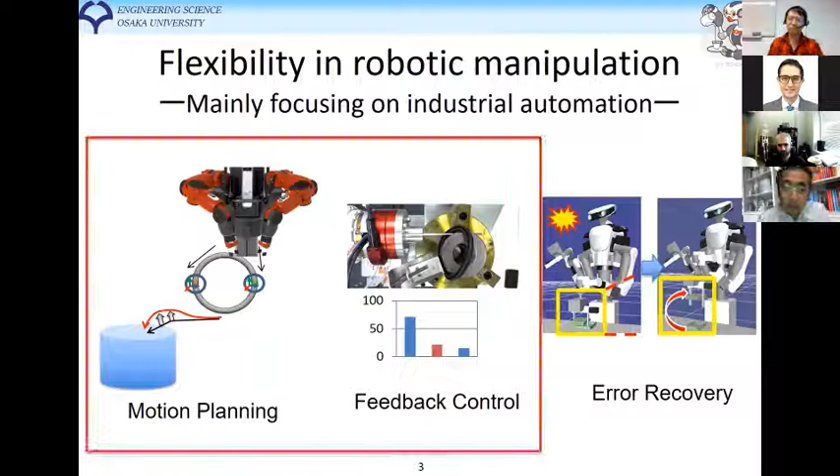Today I will briefly explain my research on robotic motion control and planning and deformation. I mainly research robotic manipulation and its application to industrial automation. Today I would like to explain three topics on flexibility in robotic manipulation: one is motion planning, the second is feedback control, and the third is error recovery. First, I would like to explain the two topics of motion planning and feedback control.

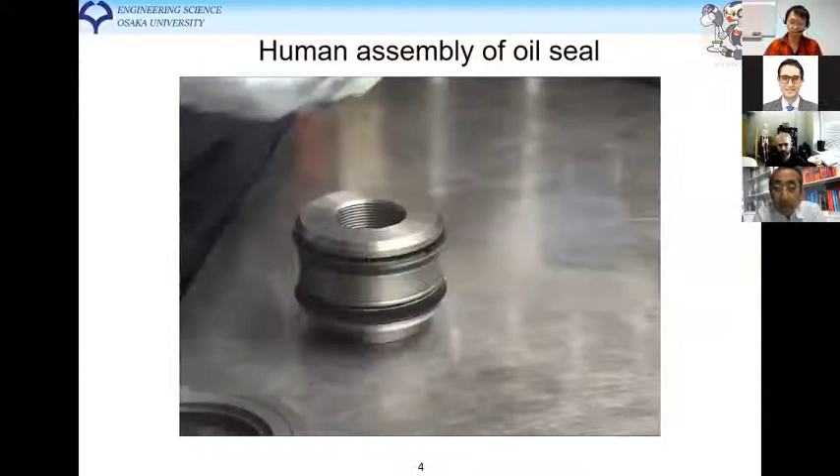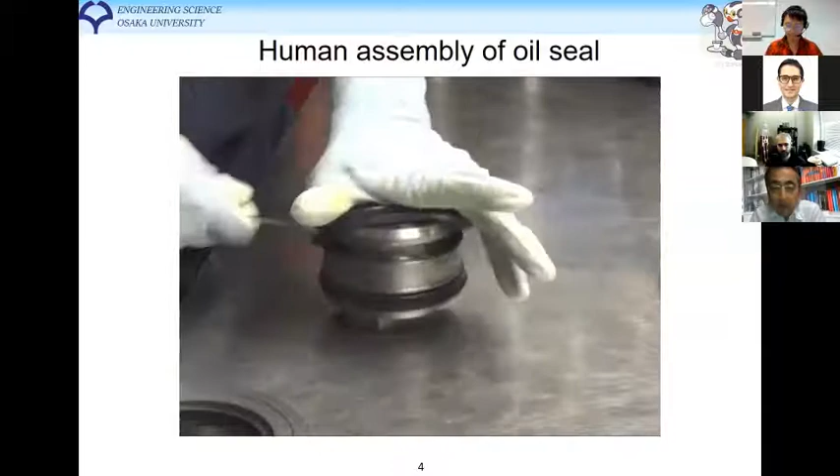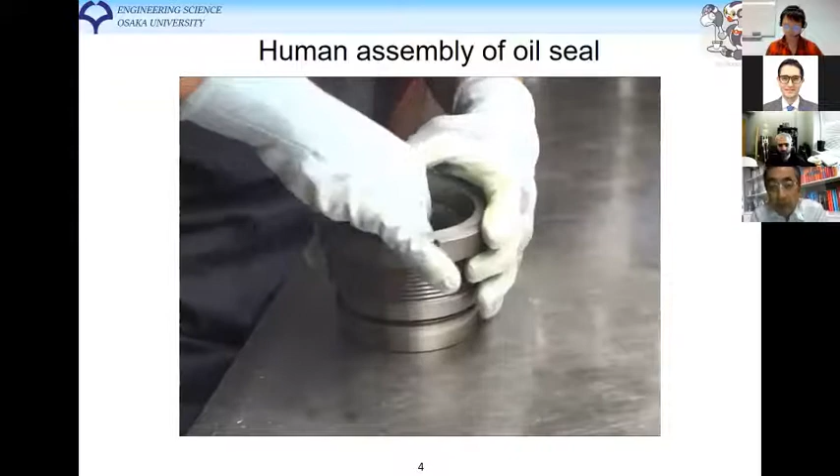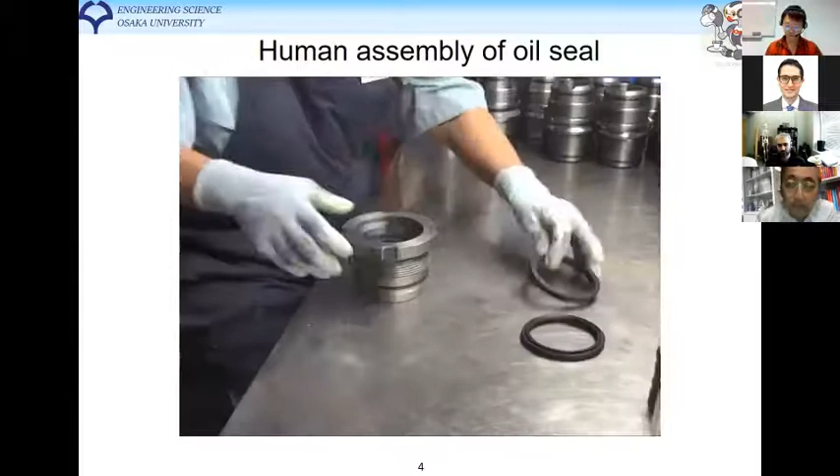This is a typical case of flexible object manipulation used in assembly. This is the human assembly of an oil seal. The oil seal is made of rubber and has a ring shape. To assemble it to the outer surface of the piston, or the inner surface of the cylinder, the human is skillful enough to assemble these flexible parts very fast. And we consider replacing this task by using robots.

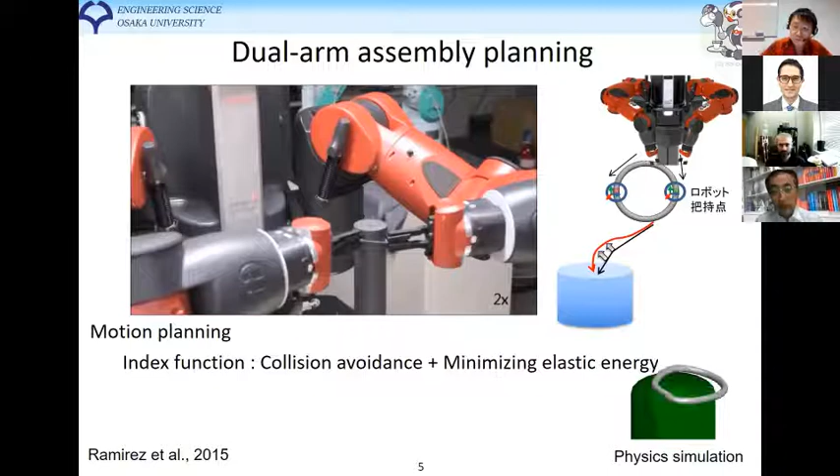First, we constructed the dual-arm assembly planner to assemble a ring-shaped object to a cylinder. In this case, we use an index function to plan the motion of the dual manipulator. The index function is composed of collision avoidance and minimizing the elastic energy. That motion is constructed with the help of a physics simulator of the assembly of the ring-shaped object.

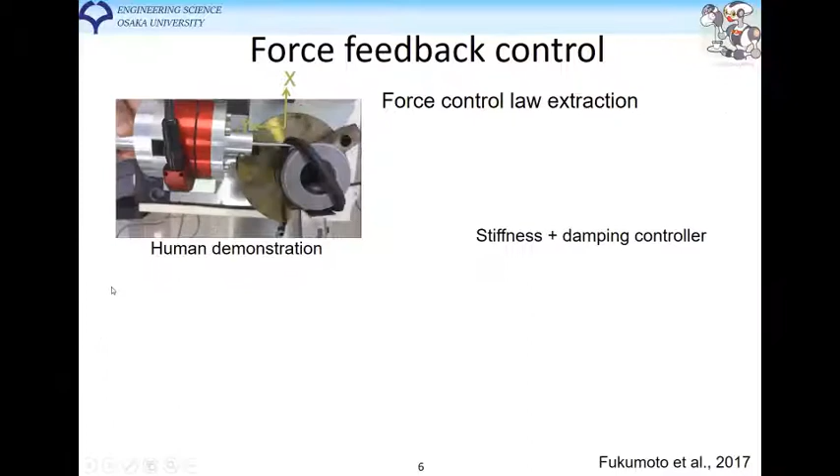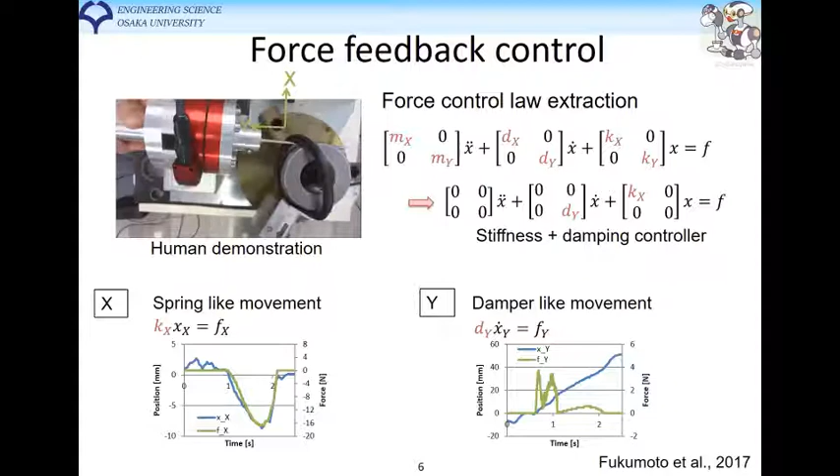Then I would like to focus on feedback control. In this case, first we use human demonstration to extract the force control law. The horizontal direction is y and the vertical direction is x. We found from the force and positional response that in the x direction, the motion is a spring-like movement, while in the y direction, it is a damper-like movement. So we decided to apply stiffness control in the x direction and damping control in the y direction.

Then we consider optimizing the force control parameters of the damping control and stiffness control. By optimizing the force control parameters, we could successfully reduce the peak force to 63%, which is very close to the level of human assembly.

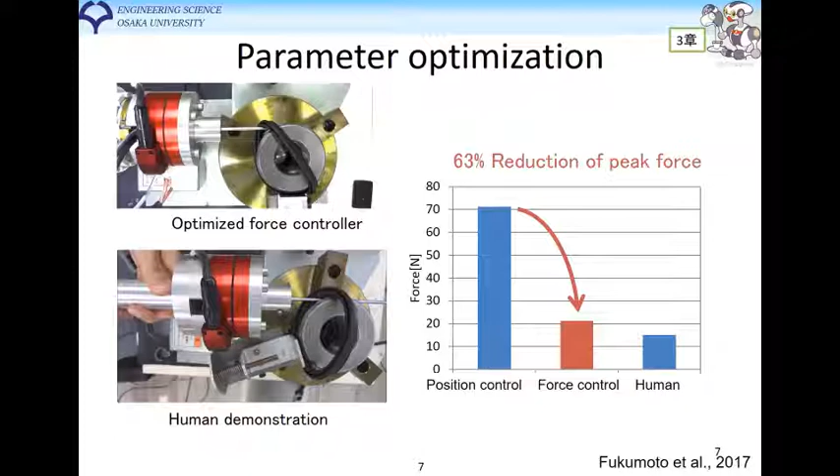Next, we would like to introduce the second topic, error recovery in snap assembly. We focus on the assembly of plastic parts, including snap joints. Parts with snap joints are very easy to assemble, but very difficult to disassemble. Hence, it is very important to identify the error state before the error actually occurs. In this video, the top shows the successful case, and the bottom shows the failure case.

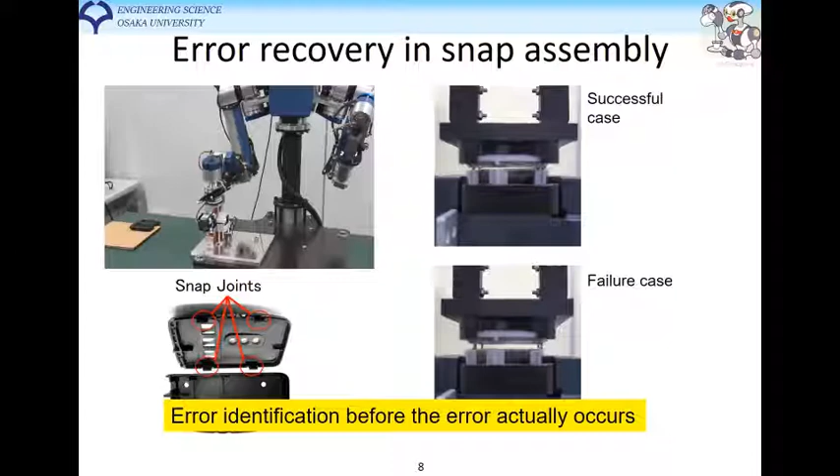This slide shows our algorithm. In the training phase, we obtain the force-torque profile during the assembly and extract features. Then we train on the features using SVM and classify the error states. In the execution phase, we first identify the error state, so the error is identified before it actually occurs. After identifying the error, we recover from the error state.

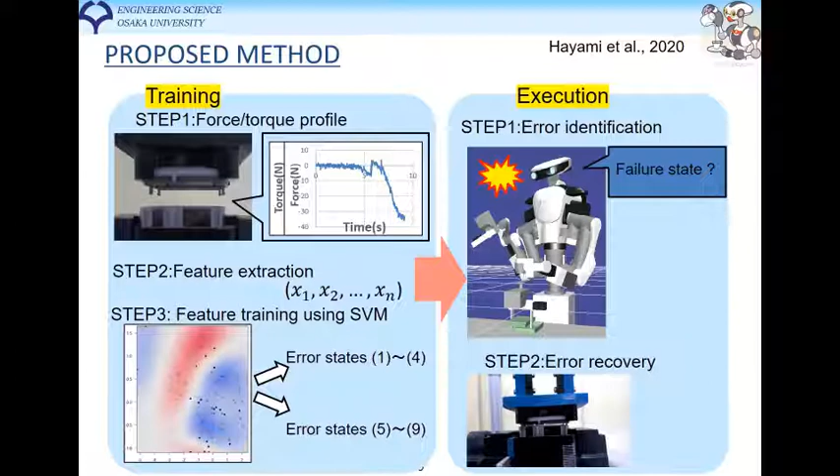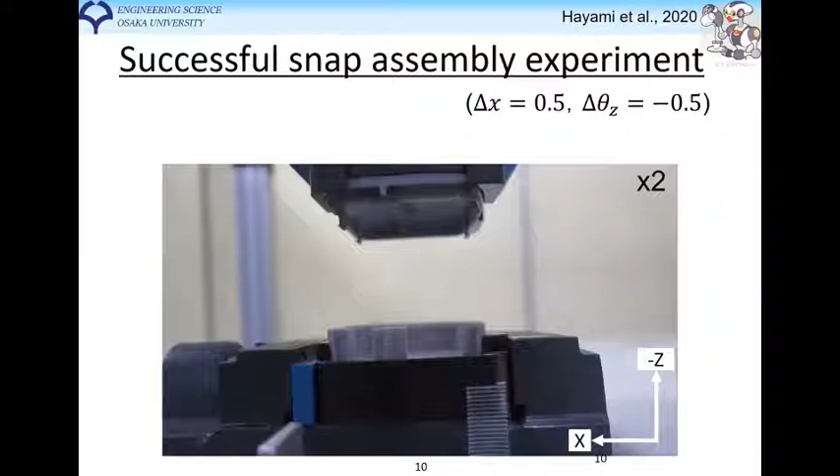This is the successful case of assembly, which is very normal. First, we stop assembling the object before the assembly is actually completed. This shows the error state, and in this case, the error is identified. Then the male part is lifted up again, the error is recovered, and the robot tries to assemble the male part again.

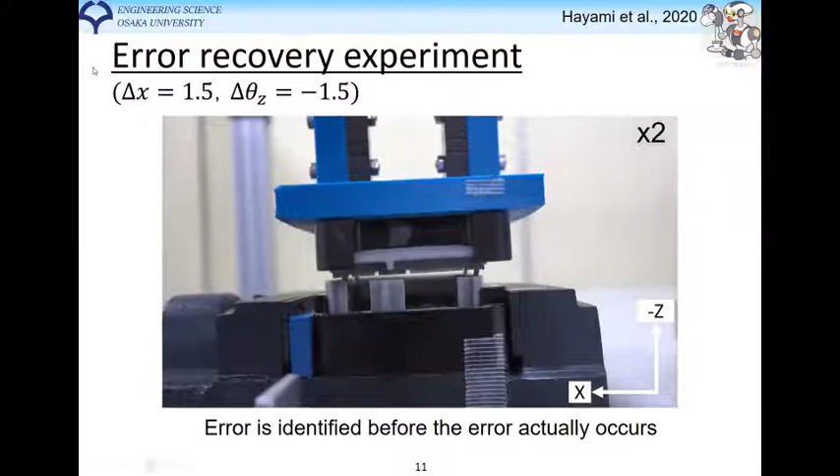And this is the final case. In this case, the error is identified. The robot tries to identify the error, but the accuracy of the identification is not large enough. So the robot additionally moves the male part in the horizontal direction a little bit, and then tries to identify the error state again.

Then the robot recognizes that the robot is going to make an error. Then the robot lifts up the male part, modifies the position of the male part, and tries to assemble it again.

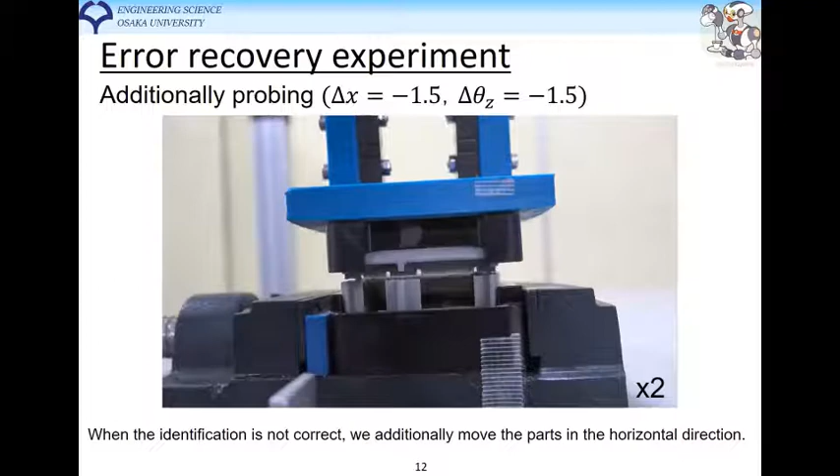I'm Mathew Schwartz. I did my undergraduate at the University of Michigan in design and sculpture. So that kind of starts off with addressing one of those questions. And after that, I went to Michigan for my Master's of Science in Architecture. And after then, I moved to Seoul National University, and I was a full-time research scientist at the Advanced Institutes of Convergence Technology with Jaeheung Park, who manages the Dynamic Robotics Systems Lab.

And through there, I connected my interest in human factors and research with robotics and manufacturing, because his lab focused on torque control, full body robot control of humanoids. Since then, I had a short time at Nanyang Technological University in the Rehabilitation Research Institute, and now I'm an assistant professor in architecture and design at NJIT.

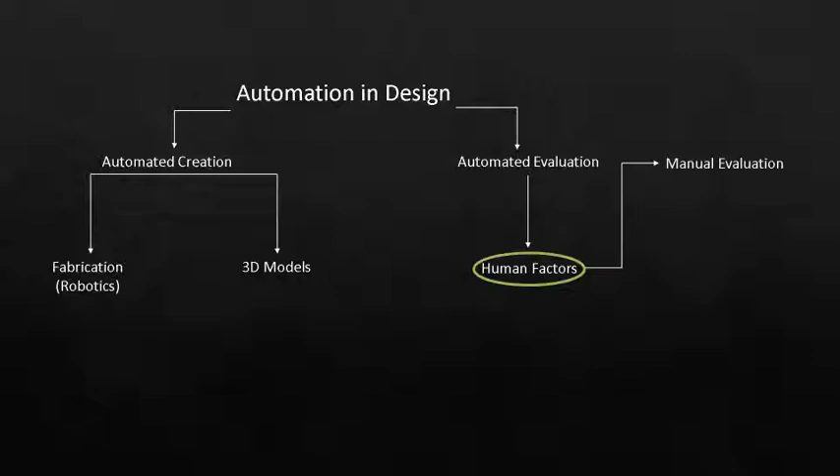So in general, my interests are in automation in design, and that kind of breaks into automated creation and automated evaluation. On the creation side, it's between creating 3D models for design or fabricating, actually making the design. And in evaluating, I look at human factors. So this could be done through manual evaluation. And the human factors link back into the 3D model, which is also connected to the fabrication of that model.

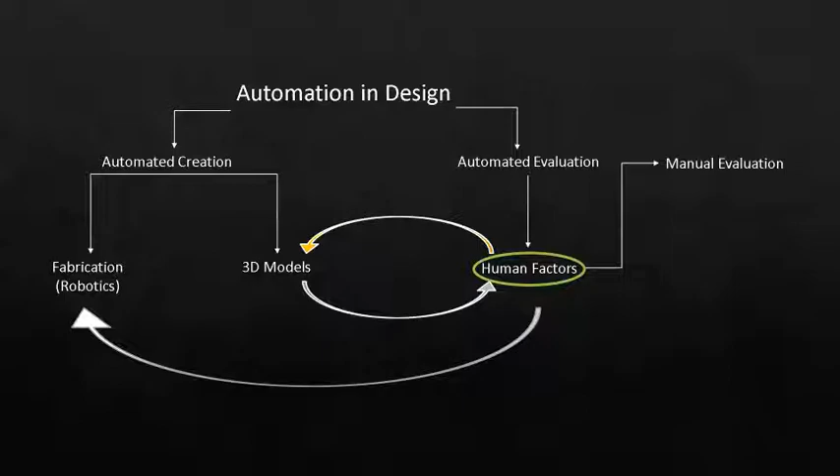And it reinforced the need of how we can do such complex robotic manipulation. We have the DARPA Robotics Challenge, and yet we still have people inside of these tiny boxes, hundreds of meters in the air, doing this manual work. And it's also repetitive. So each floor is identical, which is such a good topic for robotics.

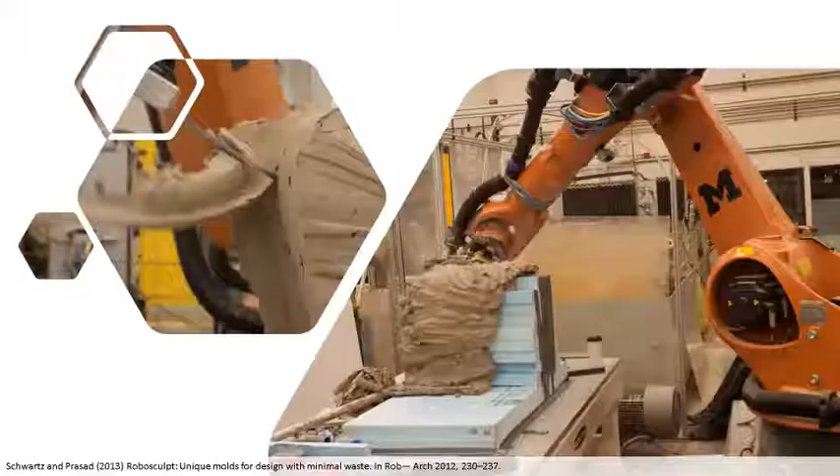Back in 2012, one of the works I was inspired to do with Jason Prasad was in sculpting clay. And the sculpting clay was for minimal waste molds. And one of the inspirations here was because of my undergraduate in sculpture, we commonly use oil clay to make sculptures, then create a mold off of those sculptures, and we can reuse that clay.

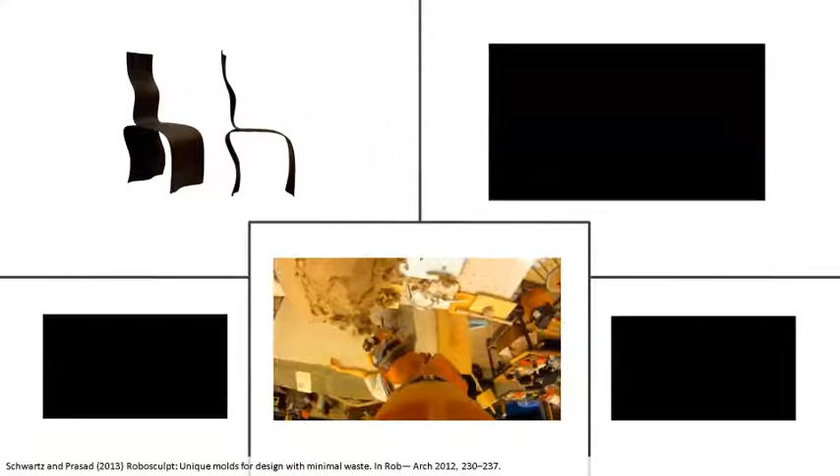So here's some videos of this process where the robot would sculpt the clay, and through it being oil clay and not water clay, we custom made the mixture ourselves, so from the soil itself. And that allowed us to, being young and not as good at robots, also mess up, right? And because it was clay, you could make a cut or a nick in the clay, and then you would just push some clay back on and recut the same path. And you didn't have to worry about the costs of ruining a really expensive mold.

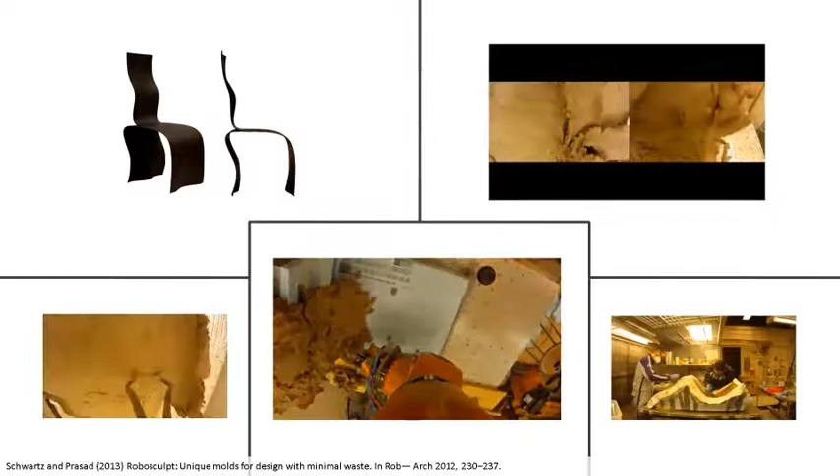So the top right video just shows we did the top and bottom of the chair, which is shown in the top left. Both of those had two different molds, but they used the same clay. So we just compacted the clay and recut the clay for a new mold. And in the end, it was laid up with fiberglass. So ideally in the future, I wouldn't want to use a manual fiberglass layup, but instead use another robot to spray the fiberglass. In the end, the chair would hold me, quite heavy, and it was quite thin.

And another project that I think is relevant here is in the difficulties of these simple tasks like floor tiling. And this brings back the motivation from a human-centric perspective. Why do we have people that are in a bent over position on the floor, hand laying all these tiles? And what I would really like to have done is something that is so simple, but ends up being complex for a person, at repetition can create something like a mosaic.

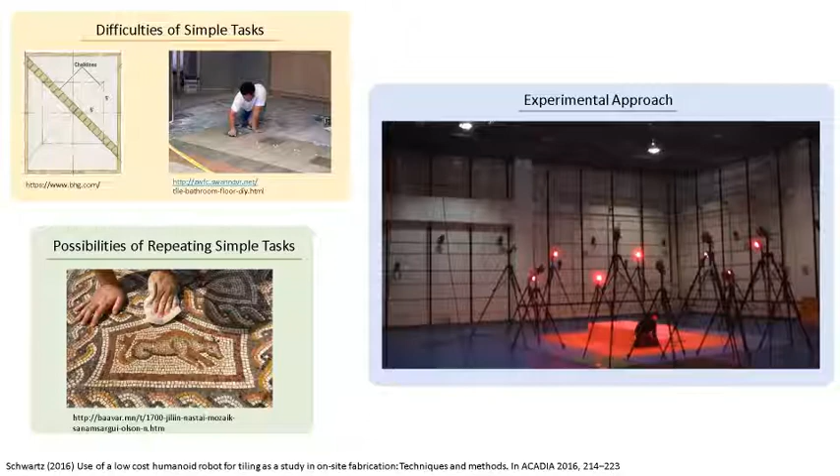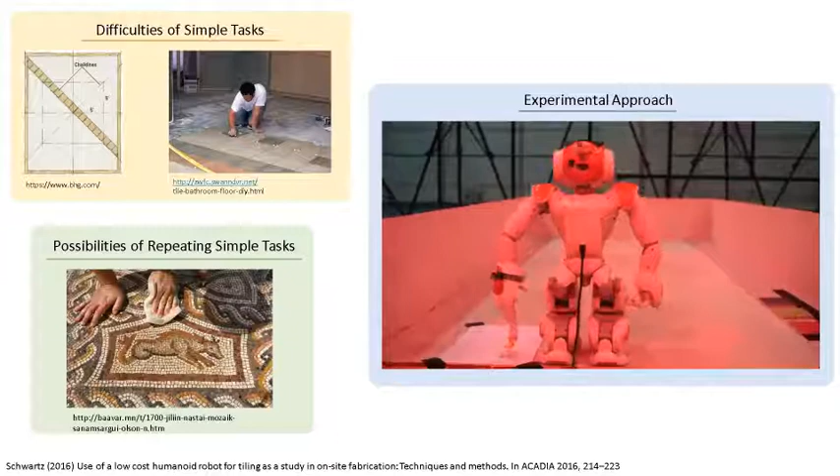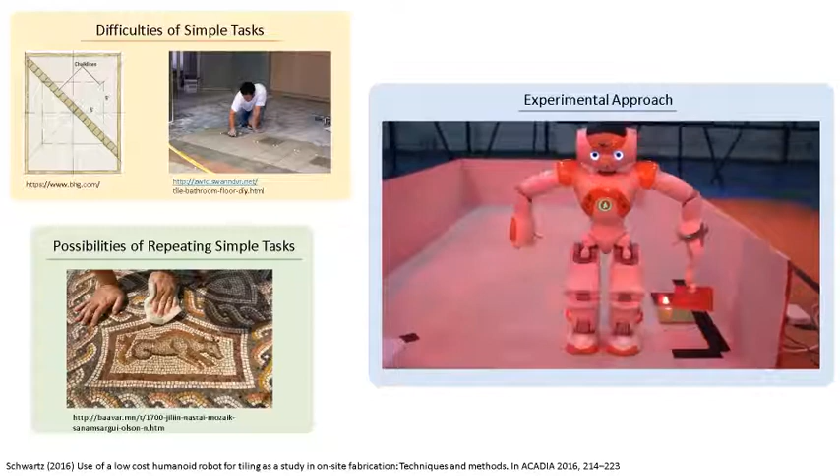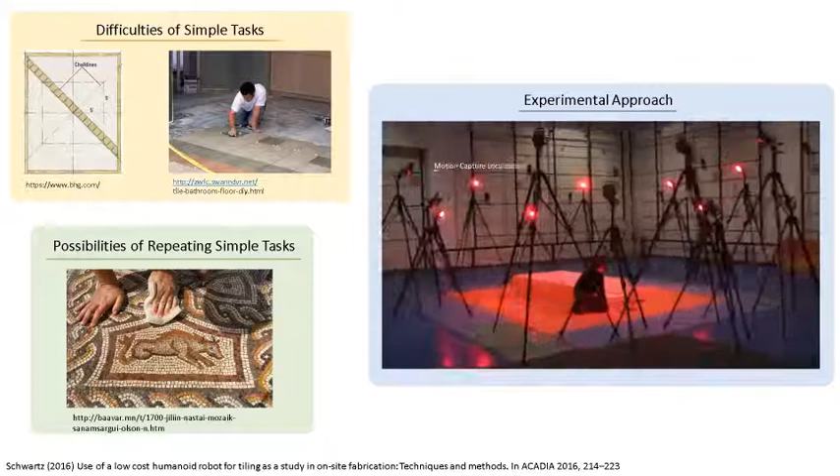And this was just an initial experimental approach where we use motion capture for localization of a small humanoid robot that we thought we could place into someone's house and it could help them tile. So we looked at, could it pick up the tile? And one of the challenges here was in the gripper. So we needed to create some sort of gripping mechanism that would allow this robot that didn't have hands to be able to pick up a flat tile. So now, in this case, the manufacturing material itself was rigid, but the gripper had to be soft and deformable in order to interact with it.

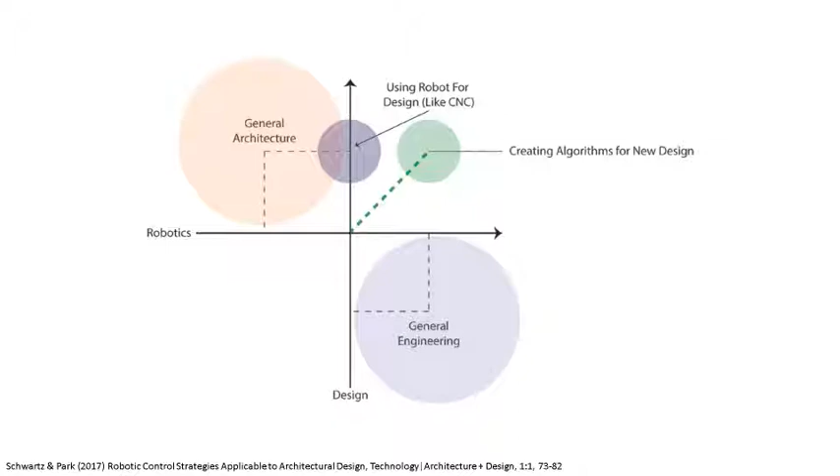So I think the future here really is about, especially from the design perspective, how we can create some new algorithms that leverage torque control that would make something possible that hasn't been possible in the past. Meaning, because of the algorithms synthesized with the method of control, we're able to create things that we really couldn't have created in the past. And not just, it's an easier way to do it, but actually better for the future. So that's it from me.

You mentioned the fact that maybe to handle deformable objects, we need torque control. How could we model this torque feedback? And do we really need to sense the object deformation, or will we be able to manipulate deformable objects without torque control? What do you think about this? Or do you think everything is solved in this direction? Or maybe you think it's not a question, I'm not sure. I'm not sure who wants to answer.

Okay, and as I explained in my presentation, to control the flexible object, I think that torque control or force control is essential. Otherwise, the robot has to be very carefully controlled to make the elastic deformation small. But yes, my answer is that basically torque control and force control is necessary, and to measure the force, a joint torque or 6DOF force torque sensor will be necessary. Otherwise, we have to control the robot very carefully. Okay. Yeah.